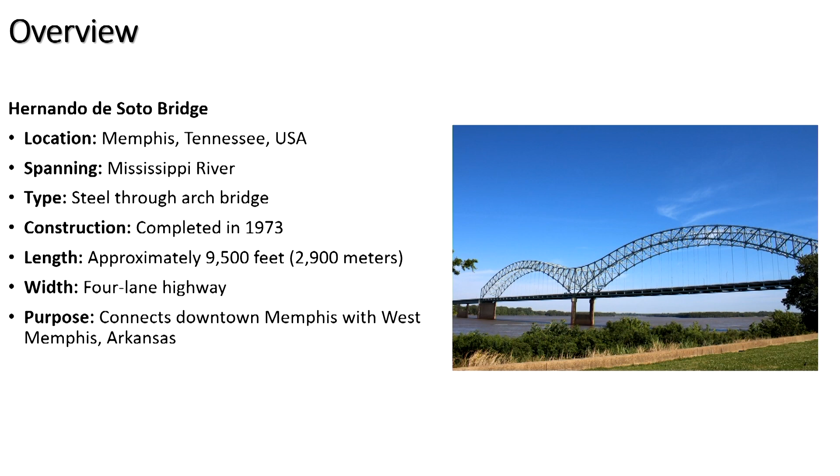session is basically just a quick overview of what happened on the Hernando de Soto Bridge, located in Tennessee. It's about 9,500 feet, so it's a pretty big bridge, 4-lane highway, connects downtown Memphis with West Memphis, carries 60,000 vehicles, is a major evacuation route, and it's pretty much the lifeblood of the city.

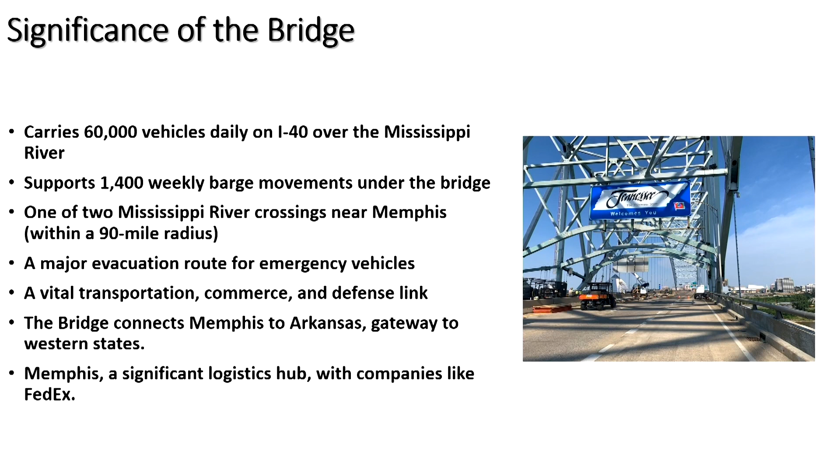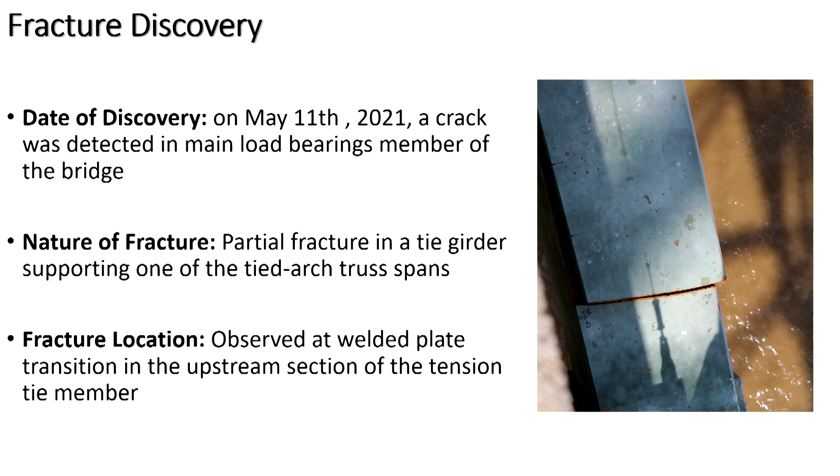The fracture was discovered, and that's actually a picture of the fracture, discovered on May 11th. It was a partial fracture of a tie girder, obviously an important function or feature of a fracture critical bridge. It was observed right at a welded plate.

This is the phone call you never want to get. I won't read it out loud, but that was on 911 that the bridge inspector called it in on. So that's what we're all here trying to avoid. You never want to have to make that phone call or get that phone call.

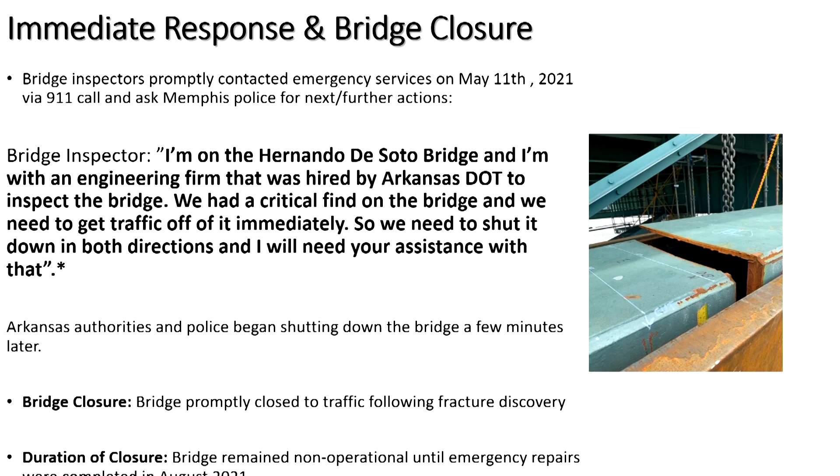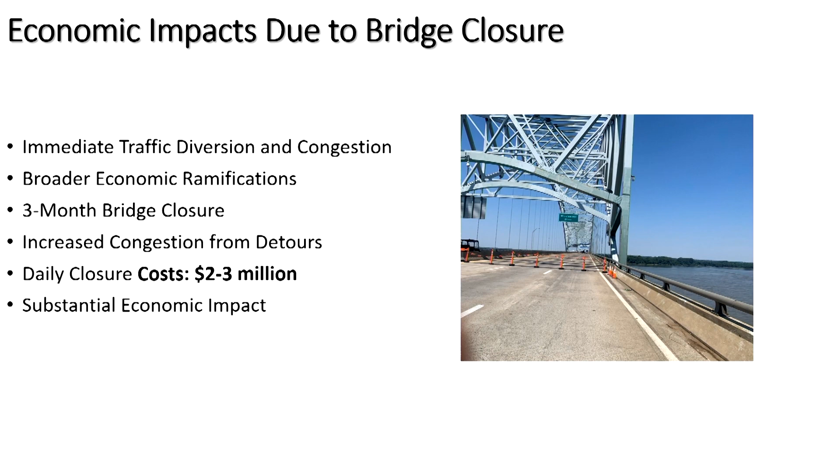So immediately upon getting the phone call, they started to set up—well, I think the first thing they did was call every smart person that they know, and then start traffic diversions. The bridge was closed for 3 months at an estimated cost of $2 to $3 million a day. Pretty substantial economic impact.

Emergency repairs were started. Before they could start, they called us and we came out and started to install sensors.

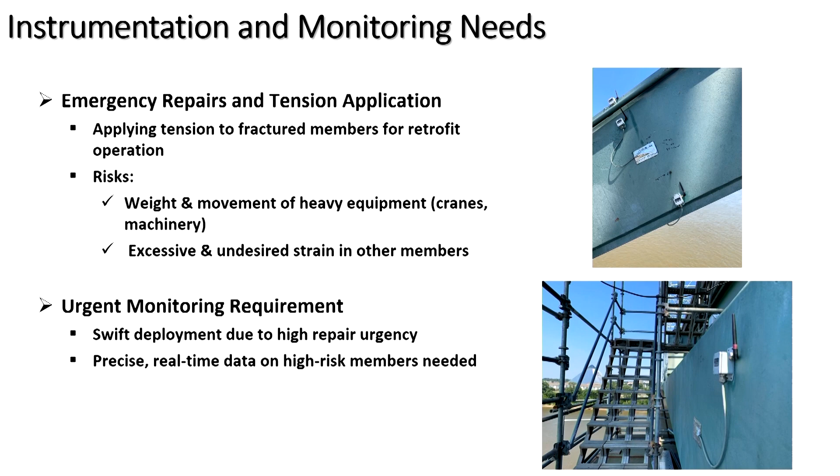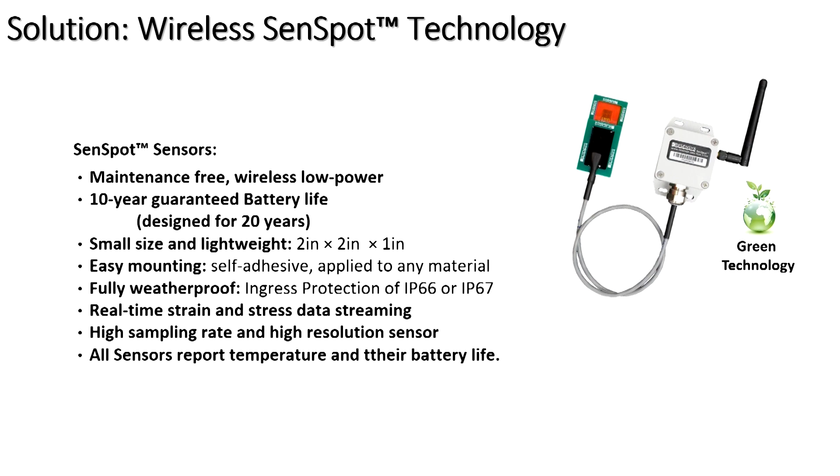This is the sensor, and this is the specification for it and for all of the Resensys different types of sensors. We have a full suite of every sensor you could imagine. We offer maintenance-free, wireless, low power sensors that require 4 million times less power than a 40-watt bulb, which is how we get to a 10-year guaranteed battery life. They're very small, as I showed you. They mount typically with an adhesive, are fully weatherproof, and provide real-time data with a high sampling rate. All sensors also report the temperature and their battery life, so as you look on your phone or computer, all of that information is provided there for you.

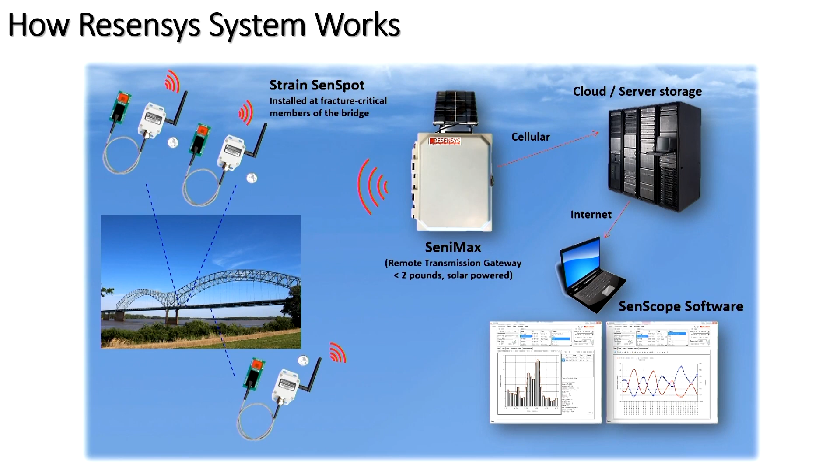This is how the system works. The sensor reports to a little node, which then goes to a gateway that is solar powered. From there, it goes up into the cloud and then to your laptop, phone, or whatever you'd like it to go to.

We are continuously monitoring everything that occurs on the bridge. It will detect overstrain and all strain, actually. The system is constantly monitoring itself and monitoring the bridge, and you set thresholds. Every time a threshold is breached, it sends an alert, so you don't have miles and miles of data on your computer at all times. You can go back into your system, and if you wanted to call up everything that happened for the last 5 years, you could easily do that and see every single thing that's there. But typically, we don't bother you unless there's something that you should pay attention to.

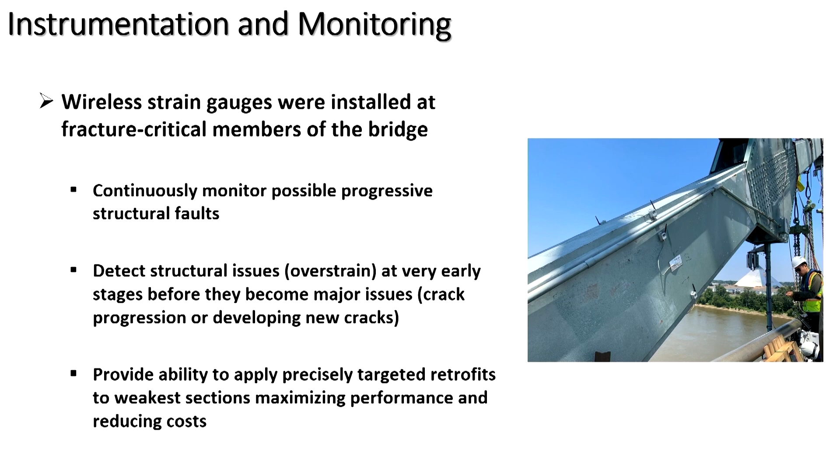It was, obviously, a lot of stress, emotional stress on the project.

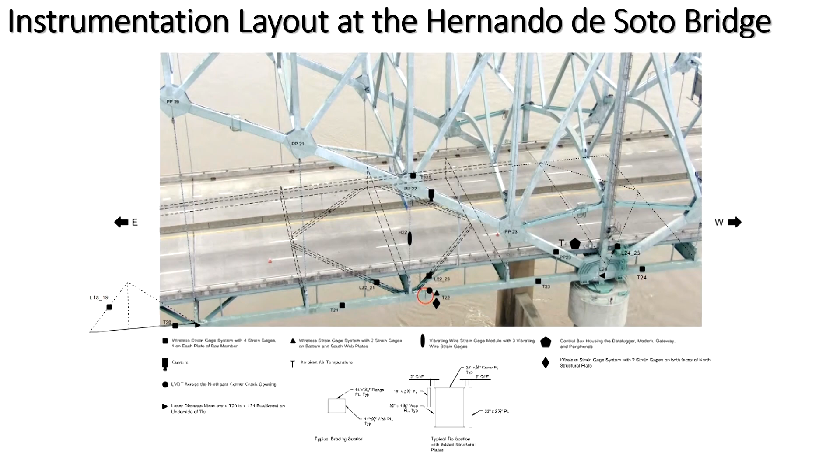This is the layout of where all of the instrumentation was placed. There were 44 sensors put on the bridge, and they were installed in less than 24 hours. If you saw the bridge, it's not like you could just walk up to them, so a lot of work had to be done to get to them, but that's just how quickly the sensors can be installed.

In addition, we put in 2 SeniMax because we wanted to make sure that the information coming from them was crystal clear because it was so sensitive. There's no need for calibration, no need for electricity, for communication. So it's very, very simple and straightforward.

In several states where we have statewide contracts, the maintenance engineers have taken charge of the system. Most of the sensors are completely reusable. They take them from one bridge to another bridge when they want, and they just install them themselves and start using them.

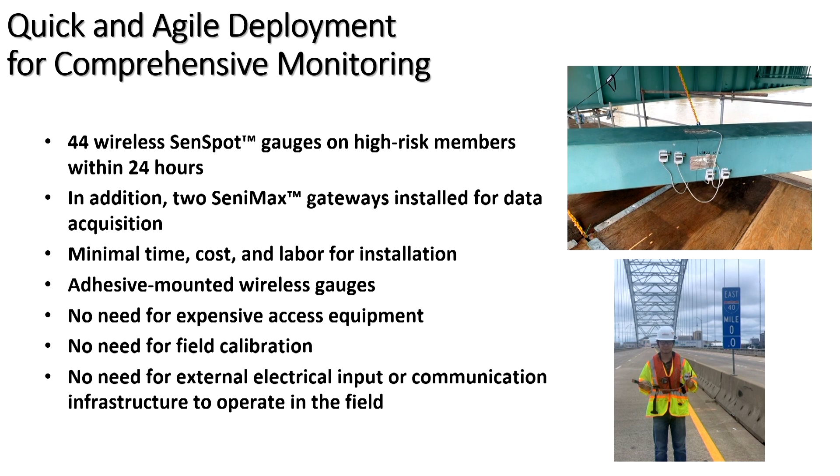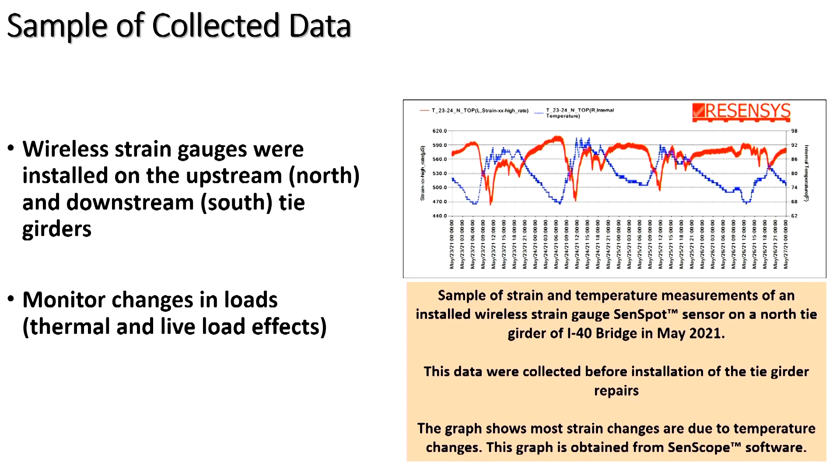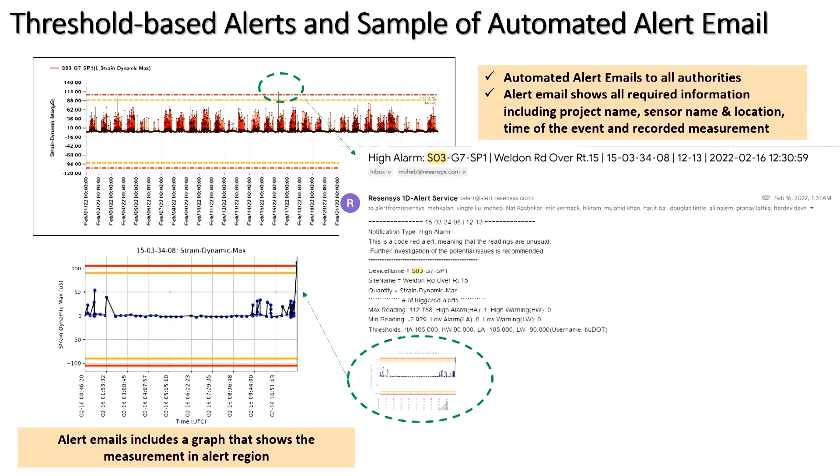What we're looking for, though, is threshold alerts. You can see the circled area where you get pinging or accelerated tension, and at that point, the system goes into overdrive and records an enormous amount, thousands of times a second, as opposed to a slower rate when nothing is really happening. So the system is always recording data, but it doesn't share the data when there's nothing happening unless you say, I want to see it, and then it'll share all of the information with you.

It was very effective. Based on the fact that they now had sensors all over the bridge, it was determined that no vehicles could be on the bridge, or there would be a pretty decent chance of additional damage to the bridge. So the contractor had to come up with unique and innovative methods to bring in new beams and fix the structure. The whole time they were doing that, they used the sensors to make sure nothing else negative was happening on the structure.

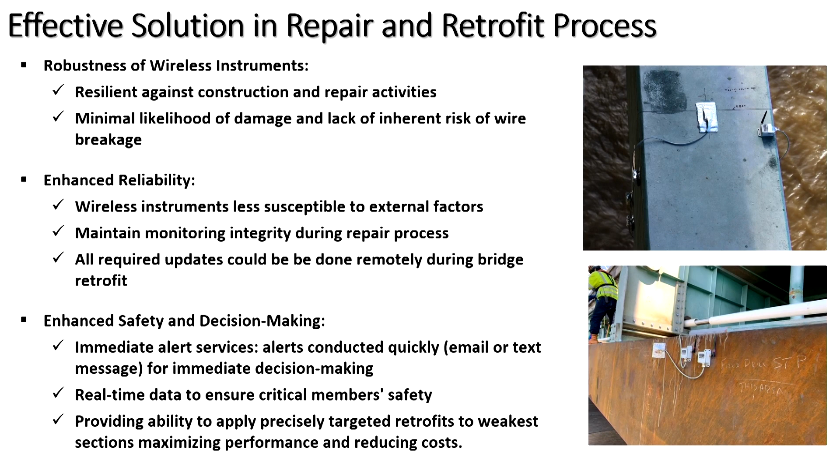The industry is changing. If you'd asked me 3-4 years ago, I would have said 90% of everything we did was reactive — an agency addressed an issue they'd seen, wanted to monitor it, and we started working with them. That's turning around now, probably 50-50, where people building new bridges are putting sensors on them to develop a signature for their structure. As we get further along with AI, it's only going to be as good as the information you feed it, so the more you know about how the structure should behave, the better off you'll be doing predictive analysis.

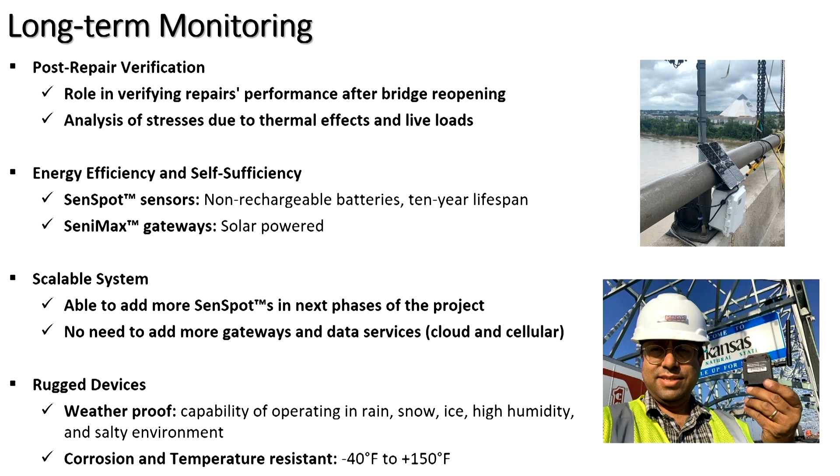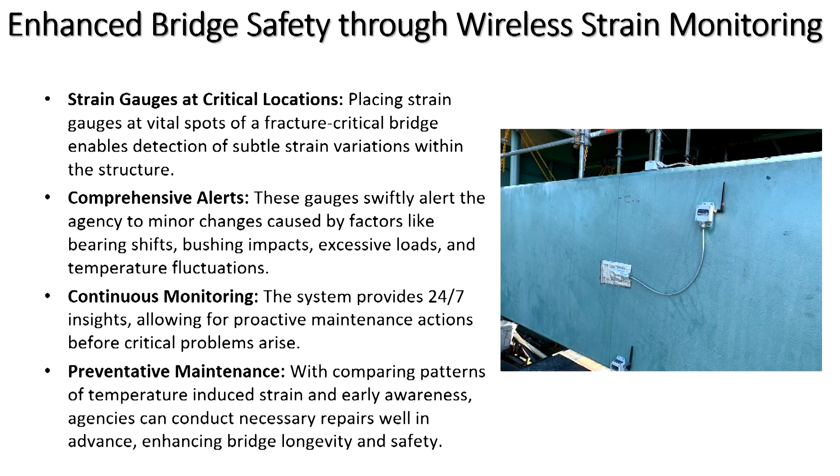Some of this is repetitive: strain gauges at critical locations, comprehensive alerts, continuous monitoring, and preventative maintenance.

So for me, and I'm more than halfway through already, this is the takeaway. It was a devastating event that took place on the bridge. Anyone who has fracture critical bridges — I'd be shocked if you told me you didn't know where the critical places on the bridge were.

The price point of sensors has gotten so low that very inexpensively you could put half a dozen sensors on most bridges, know exactly what's happening at those critical junctions, and never have to worry about a crack like that — the system will tell you if somebody sneezes on it. We can monitor the weight of every overweight vehicle, the effects of wind gusts on the bridge, and the strain to see what the weakest areas of the bridge are. So it really becomes quite simple to protect yourself against those types of catastrophic events.

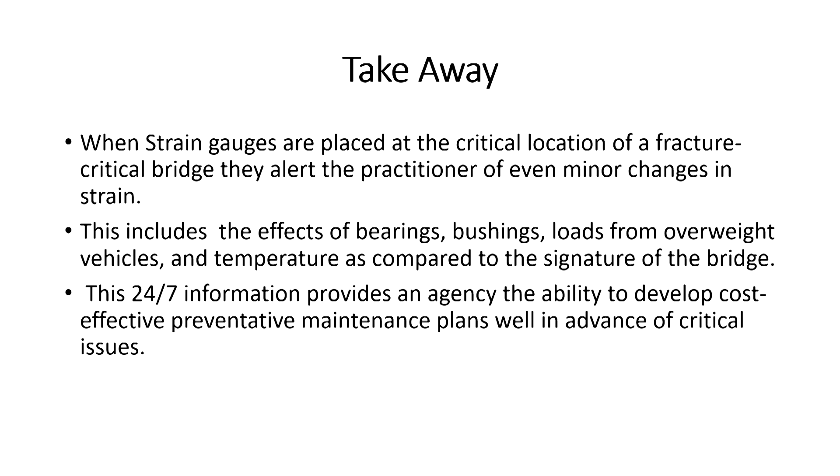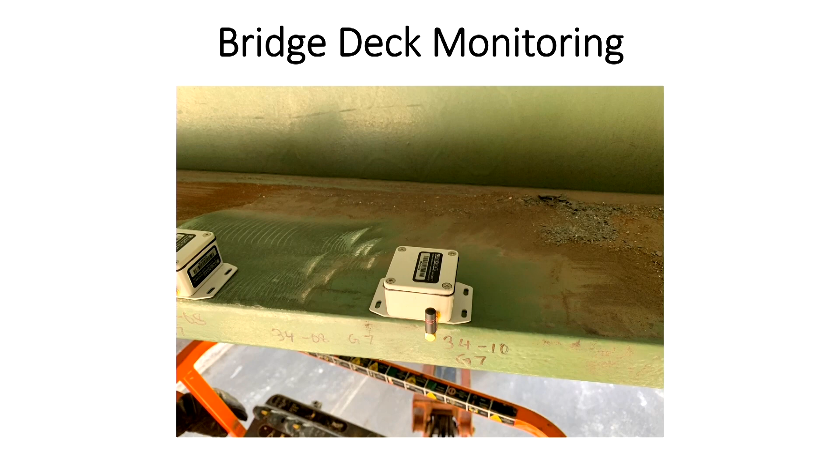Since I have a couple minutes more, I'll go into one additional application, because these are, in my opinion, real-world applications — no research required here. That's bridge deck monitoring, which we do all over the place. That's done not with strain gauges, but with both displacement sensors and tilt meters. So what we typically do is...

Bridges are elastic when they're new. As they get older, they lose their elasticity. As they lose their elasticity, more and more strain is seen on the bridge, which is why they start to deteriorate.

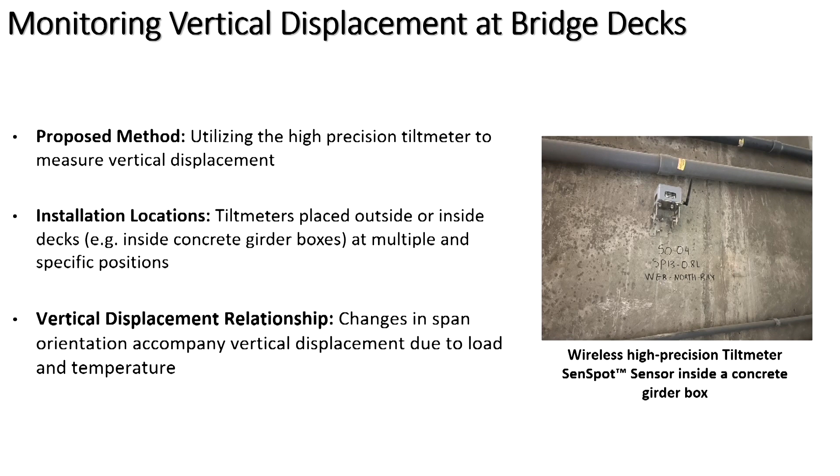So our software — well, this is just a calculation, and if Mehdi was here, we'd spend 10 minutes on this slide — but this is just a formula used to look at vertical displacement on bridges, and what that really means. I'm more than happy to have that conversation with you at another time, because I'm not that smart.

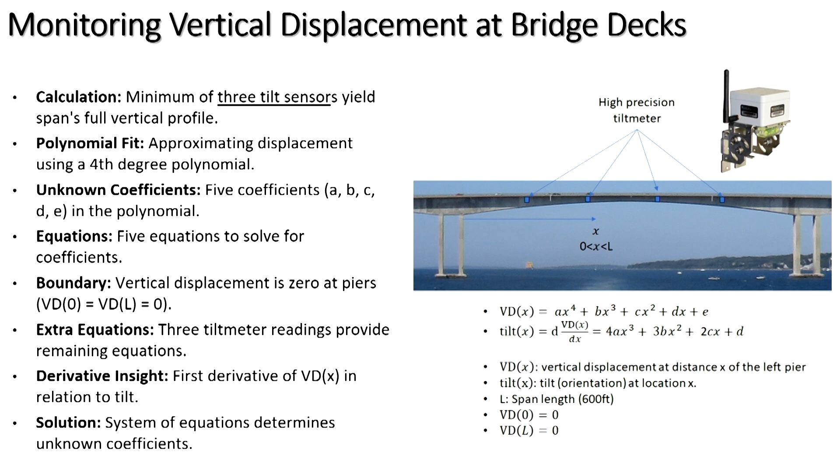So we can develop a basis by which you can measure the age of your deck and determine how long the deck is going to last by looking at whether or not it's tilting and how much elasticity is left in the deck.

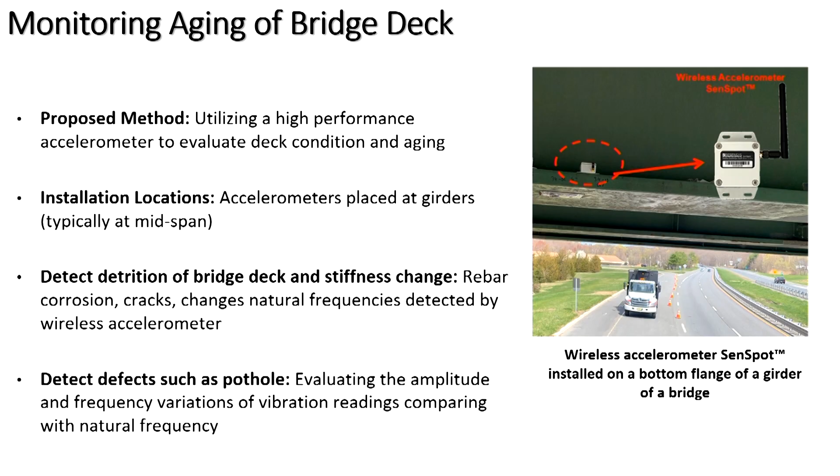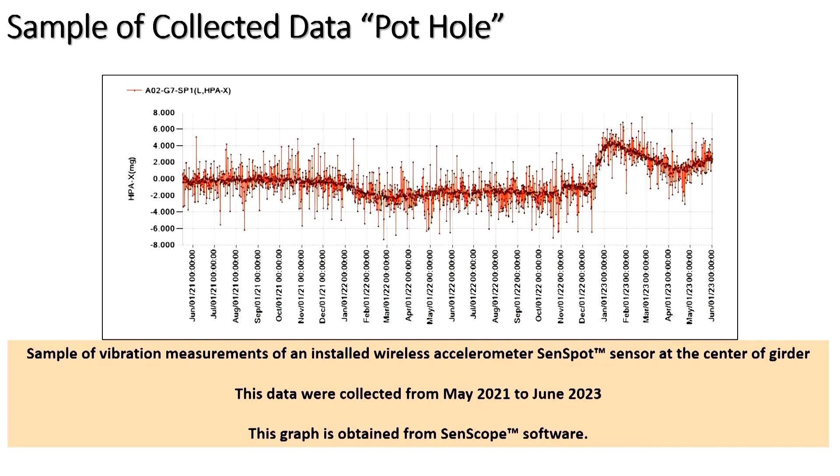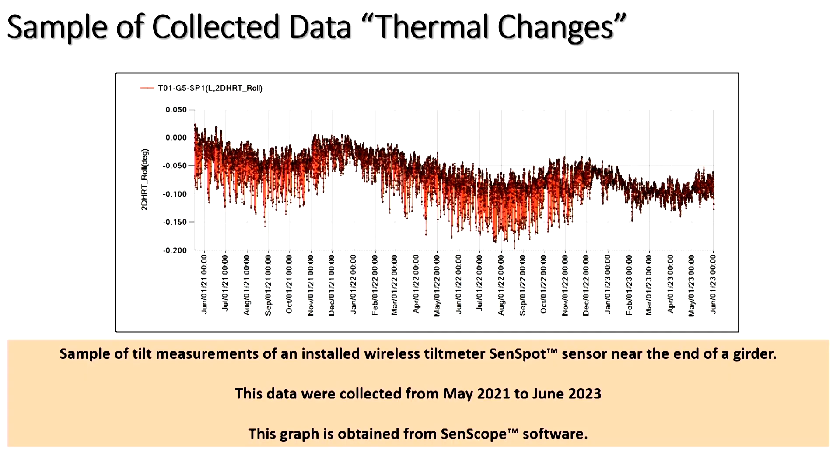I'll say the state, because I won't say what bridge. In Pennsylvania, we actually helped PennDOT because they had a bridge that was heating up on one side and staying very cool on the other side. The bridge was racking to the point where it was making huge sounds, and we were able to see what was occurring because we had sensors on the bridge. Instead of spending a lot of money to do construction on the bridge, they drilled a couple of holes, and the problem was fixed.

Is there anybody from PennDOT that knows what I'm talking about? All right, good. It was a really good job for Pennsylvania.

And then finally, our software, which is called SenScope, has a built-in FFT function which reads natural frequencies and can do analysis for the comparison of bridge decks. Engineers can utilize this data to predict the timing of necessary deck repairs based on the bridge's performance and behavior over time. And that is where we all want to go.

You want to be able to say with certainty you know the state of your bridge. And the FHWA has said that if you have systems on your bridge and you can prove that you know what the state of your bridge is, instead of doing a real inspection every 2 years, that can be extended to 3, possibly 4. At the same time, I would say to everyone here, this system will never replace bridge inspection.

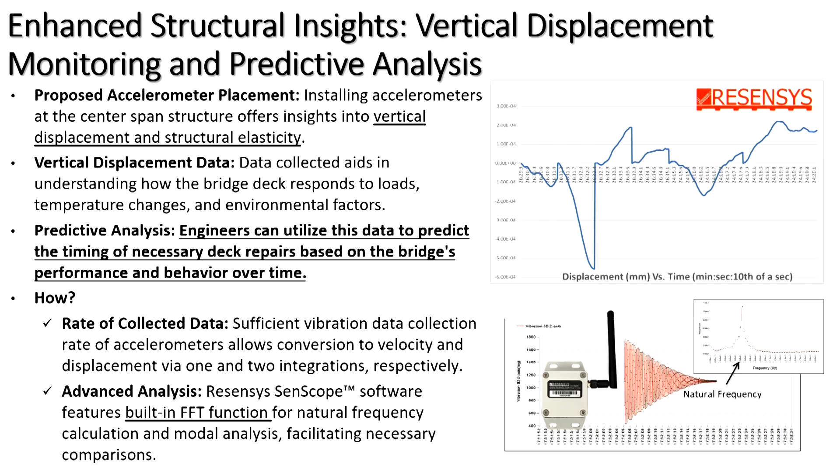We consider this as a tool for the inspector. Instead of going up to a bridge and really not knowing what you're looking for, these sensors can provide real information of what is going on the bridge now, and give him some real direction as to where he should be looking. He knows what the weakest area of the bridge is. He can look there. He knows that the tolerances of the strain are still within the design of the bridge, or whether they're not, and then maybe what he needs to do about that in his reporting.

As a conclusion, basically structural health monitoring just does this: it detects pattern changes, thermal effects, live loads, and structural changes, and provides quick notification. And it allows agencies and interested engineers to be proactive in their potential use.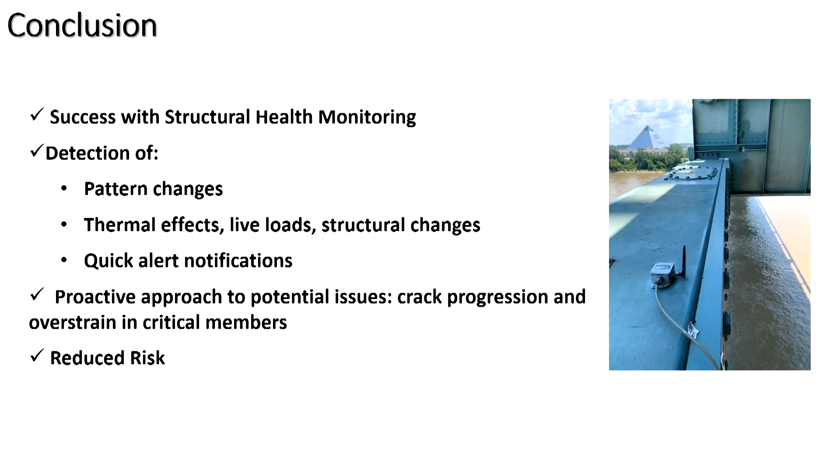So I would end by saying the weather is becoming more and more severe and more erratic. We have in the Northeast, we're becoming much more prone to flooding. If you don't know what the state of your bridge was before the flood, you certainly don't know what it is after the flood. If you had this kind of information prior to a flood, you would be able to go up to the bridge, or even during the flooding event, you would know exactly which bridges you needed to attend to immediately and which bridges appeared fine, and maybe which bridges you had some type of an occurrence and you needed to go see them in 3 to 6 months.

The same is true for hurricanes. Down south, we're doing a lot of scour monitoring and hurricane monitoring. The agencies can actually start to see what the effects of these storms are on their bridge while the event is taking place, and then use their rare assets after the storm to determine which locations they need to go to immediately.

And as I said, not technical today. I would just ask you to start thinking about those applications. What keeps you awake at night, and what kind of information would you like to get from your bridges?